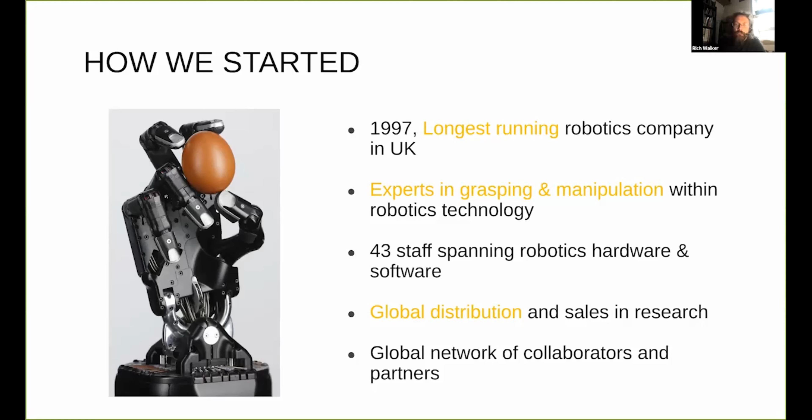ANA approached us a couple of years ago to say, as an airline, we're trying to move out of just doing flights because we think that it's a very crowded market and it's very, very competitive, and we'd like to do something innovative and novel. And we said, okay, why are you talking to a robotics company? They said, well, because we want to do telepresence. We want to put people in distant locations and fully immerse them there, make it possible for them to feel like they're actually in the other place without having to travel there. Wow, we said, okay, that sounds like a really interesting challenge.

So what did we put together? Well, working with SynTouch, who make touch sensors, and HaptX, who make haptic feedback gloves, this is the system that we had running in January last year in Tokyo. This is right in the heart of Tokyo in ANA's headquarters building. And on the right there, you can see Jeremy Fishel from SynTouch typing successfully.

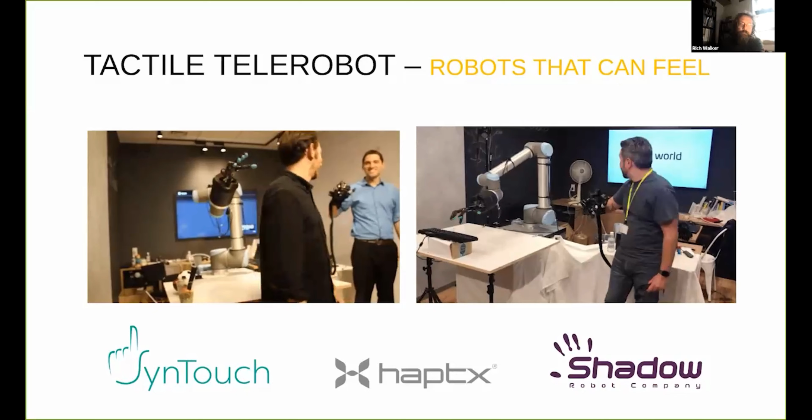We've run this from quite long distances. People ask us about latency, and we say, from London to San Francisco with a 4G connection in San Francisco and our normal internet in London, we were getting around 160 milliseconds latency. We had a bunch of journalists in the Wired office come up, put the glove on, and play with blocks, cubes and sticks and balls in our London office. We had about half a second latency on the Zoom call we were using for the remote vision.

The really interesting thing is if your vision lags your sense of touch, it's actually fine, because when you reach to touch something, you can feel the object before you see that you've touched it. If your touch lags your vision, however, reaching for things is very difficult, because the hand occludes the object just at the point when it gets critical to know exactly where it is. That's when we thought to ourselves, actually, this touch is really giving us something important in terms of using a hand remotely and getting a human to be able to do that.

Just to go through the system: essentially we've got the robot hand on the left, the human intelligence at the top, and the sensing of touch at the right. The Haptx gloves at the top give us the ability to render a sense of touch to the human. They have an array of inflatable pneumatic bladders on the fingertips that inflate and deflate, with high frequency control, so you can create perceptual illusions of various types of touch and contact.

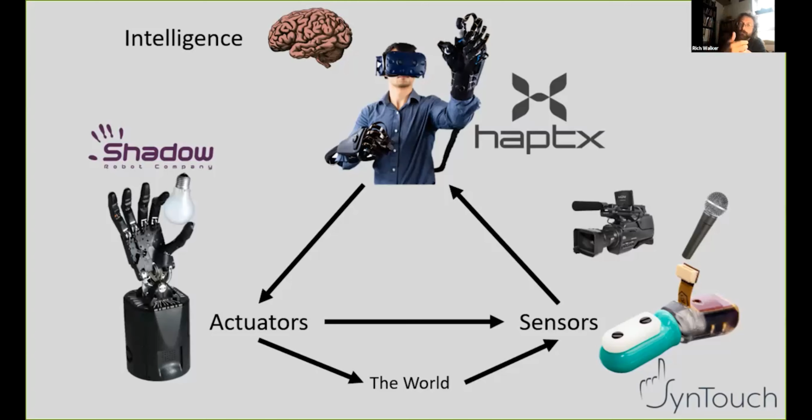So we close the loop around this chain, from the human intelligence through the actuator into the sensing, via the sensing at the remote end. You can see here a couple of examples of what's possible.

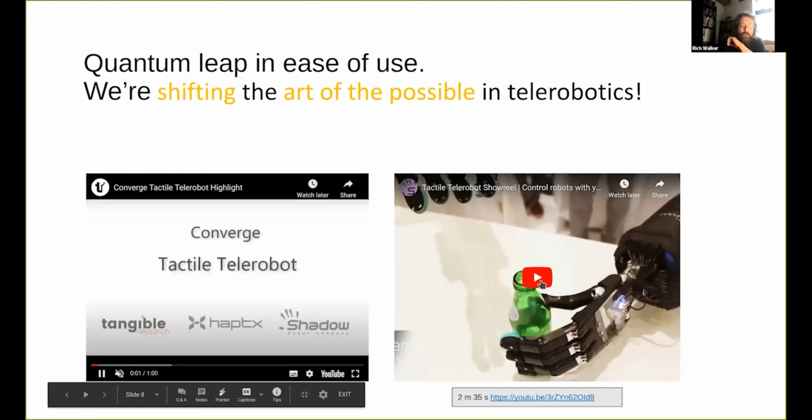I'll just leave this playing for a second. This is basically what we were exploring last year with this system. We think this is about the most dexterous telerobot system in the world, in terms of being able to perform simple tasks really, really easily, and being able to perform complex tasks at all.

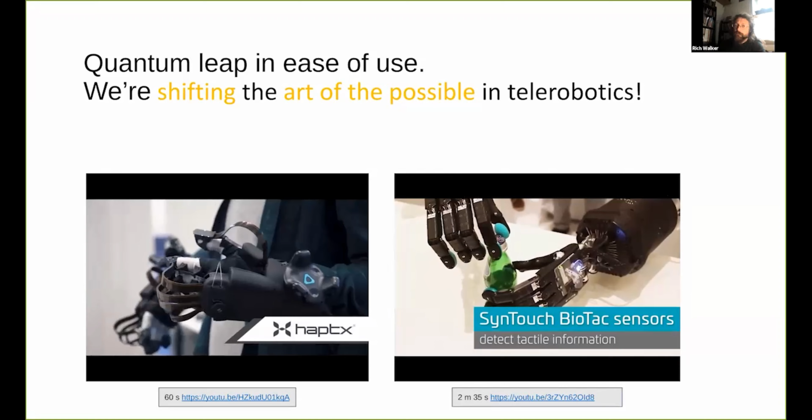Some of the things we're doing here with this telerobot are incredibly challenging, and we've never seen anybody do it with software systems at all. Even some of the reinforcement learning things OpenAI have been doing address tiny parts of this and don't address the full spectrum.

And then there are things that are really hard to do even with this. Putting the cap on the bottle is really subtle, and if your vision is occluded, it's really, really hard, even with a sense of touch.

But we can even just about handwrite remotely. That's what we call medical grade handwriting — if you can read a doctor's writing, you can read what that's written. Otherwise, it's pretty much useless. But we'll get there.

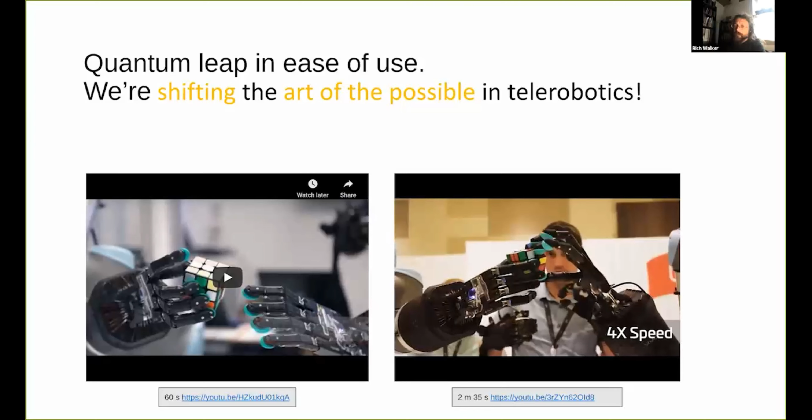And as for the Rubik's Cube, unpacking it, taking it out of the container, taking it out of the package, that's actually really challenging. Twisting it and rotating it is surprisingly easy, although knowing what you need to do to get it to work is obviously the core challenge there.

And the other thing that we're able to do with this is to handle objects that we can't quite see remotely. So again, that's a really important thing. Touch gives you the ability to deal with something where you can't tell what's going on. And here there's just reaching into a bag and taking an object out of the bag, and the operator has an occluded field of vision there. They know there's something in there, but they don't know what it is.

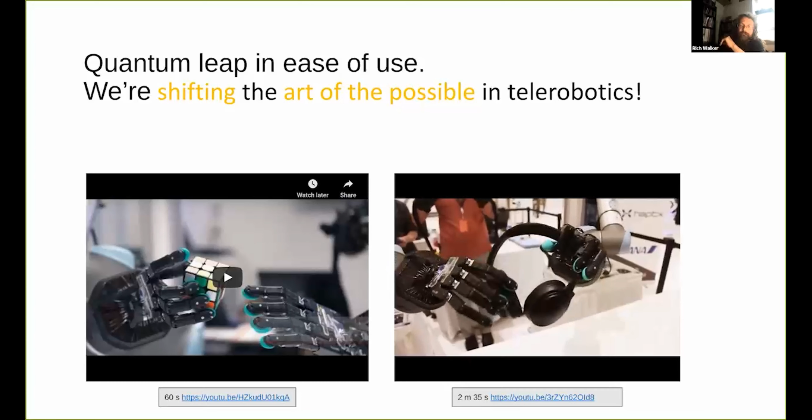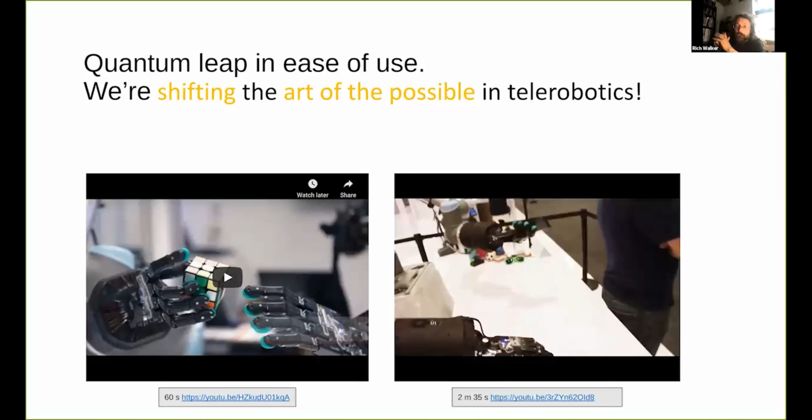Nice thing about using cobots is, of course, doing things like that is relatively easy. Your kind of risk management and risk assessment is feasible. And here's the kind of second intercontinental massage. And the flexibility of the movement here is really, really good. This is a level of dexterity and agility that we were, even doing it, impressed by. I wouldn't recommend doing this as your source of research funding, but we were in Vegas, so we figured that a little harmless pickpocketing was something we could probably get away with.

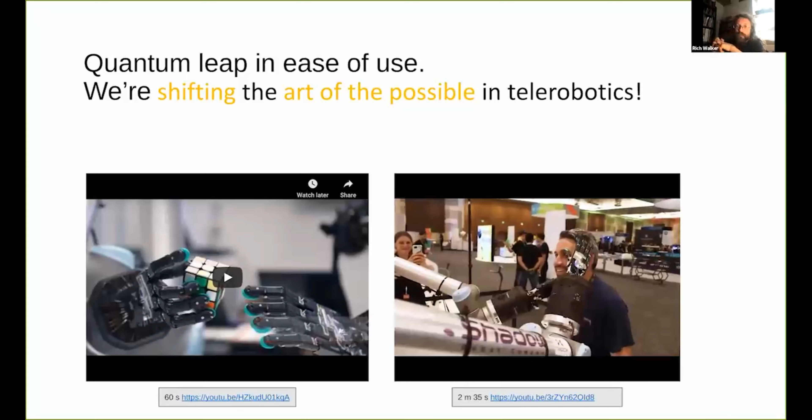One thing I don't know is whether we could actually feel Jeremy's pulse at the point when we were touching his neck. I think that might be just beyond the touch sensors yet, but it's an interesting direction to go in.

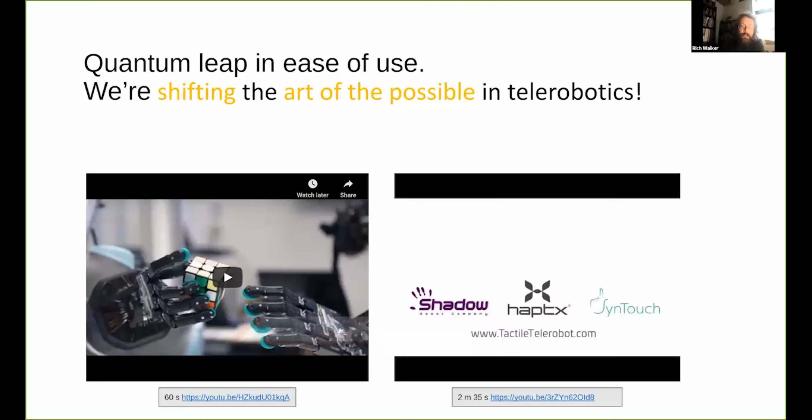So what does tactile sensing give us here? Well, the BioTac that we're using is a well-known sensor in the research community. I won't spend too long on this because either you know about the BioTac and you're familiar with them, or you don't. But to be honest, it's a 10-year-old sensor, so there's probably better out there in the state of the art now.

The practical point for us is that this is a sensor that I can simply send a purchase order to someone in California and a couple of weeks later get a sensor back that matches a spec sheet, that matches a functional spec, and has an interface that I know what it will be. And it has a reliability and a robustness that means I can then send that on to a customer and expect it to work. What the sensor does is almost secondary to that. For me, commercially, the ability to buy it is the key thing that makes a difference between this being an interesting R&D collaboration, let's see what we can do with this prototype sensor, and this being a real sensor I can tell other people about and make and ship.

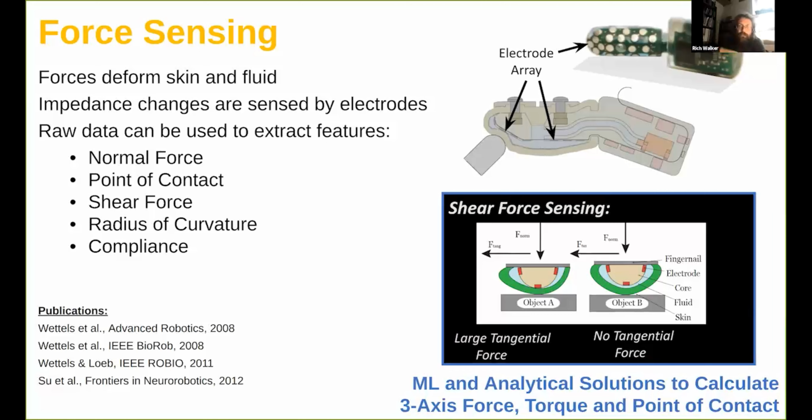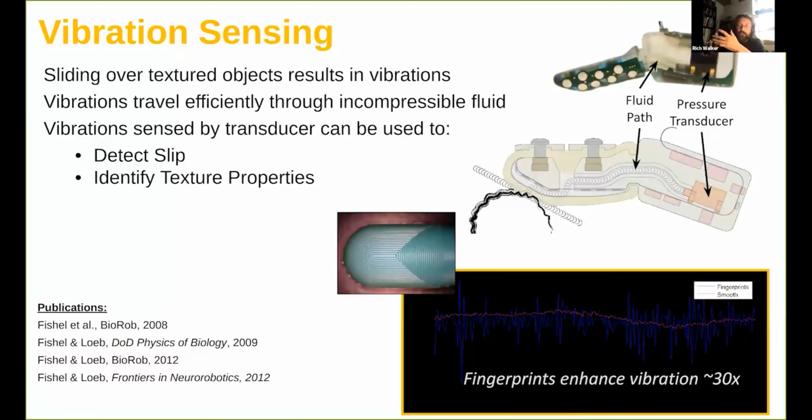So this sensor here is quite nice because it's a fusion of multiple techniques to do sensing. It has force sensing from this deformation of the skin. It does vibration sensing with a pressure transducer. And that means it can replicate some of the properties of the fingernails, of the skin surface, that gives you the ability to understand slip and contact and movement.

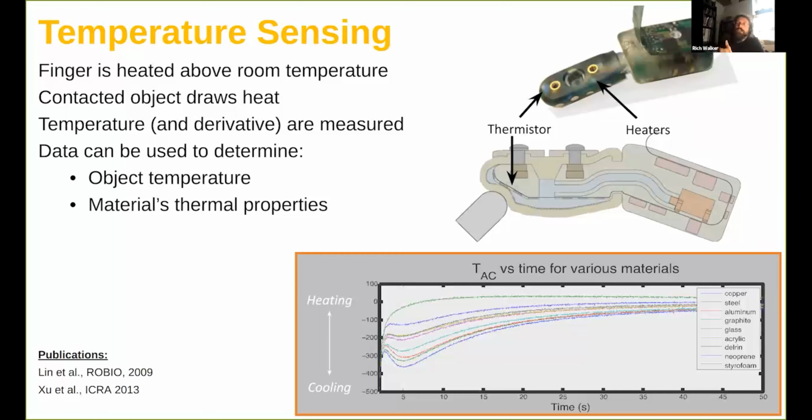It has temperature sensing because it's a little bit warm. The temperature sensor means you can actually tell the characteristics of the material you're contacting when you touch it, by measuring the change in temperature drop at the point of contact. You can see at the bottom some results from SynTouch analyzing how different materials behave when touched, and in fact SynTouch have demonstrated they can pull out this sort of map of 16 or 17 characteristics of touch for an object.

And use that to quantify what the sensor is touching. They now have a separate product line consisting of a touch sensor used for materials characterization, which they sell to people doing such fantastic pieces of engineering as: I'd really like to make a seat that feels like it's made of really expensive leather, but I don't want to use really expensive leather. Which of these plastic substitutes feels like that expensive leather? Using this kind of characterization analysis model, they've actually been able to successfully do those kind of discriminations.

So it's now used in high-end design to say, okay, how can we scientifically show that these materials are equivalent to the materials we wanted to use in terms of how the human feels and understands them, which is pretty cool. Of course, the challenge you then have as a teleoperations system designer is how do you take that complex set of data and turn it into something the human at the other end of the system can understand. That's still a technical challenge for us. If you have better ways of doing haptic rendering, I'm also interested in talking to you about those later on.

So what does it do for robotics? Well, touch, very fundamentally for humans, is what we use to connect with the world. We see things, but we don't believe they're there unless we touch them. That's a very important grounding for us. The sense of touch, your ability to interact with objects, is a huge part of how you learn your motor movements, how you learn to interact with things, how you learn to operate in the world. Without a sense of touch, it's very hard to actually get vision to work. Vision bootstraps partly by touching things and moving things through the field of vision. So it's a really important fundamental part of the way the brain works.

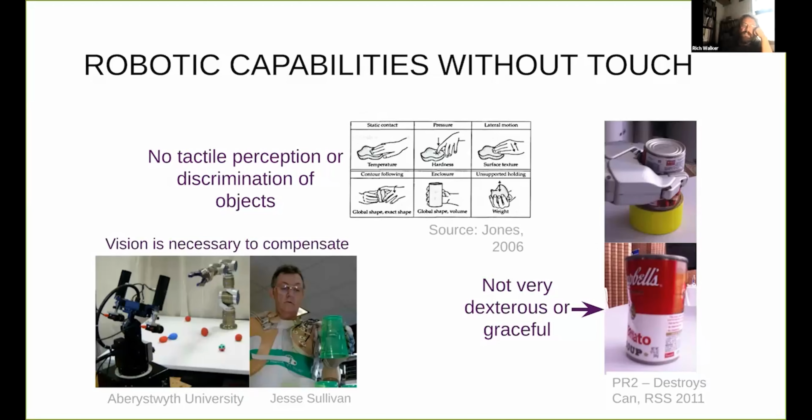There he's picking up one of the plastic cups we were using earlier, but it requires an absolute sense of concentration from him. He's looking at it all the time, really concentrating. If you have a sense of touch, suddenly movement becomes fluid because you almost delegate picking things up to your sense of touch. You know where the object is roughly, you reach for it, you try and touch it, you feel it, it's there.

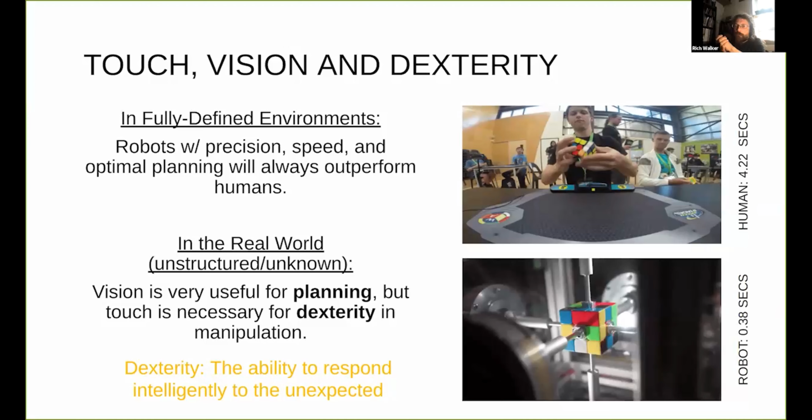So here we see working in constrained and unconstrained environments. The robot on the bottom is obviously over-constraining the problem and can just use vision to solve it. The human at the top is using both vision and touch, although I suspect they could do that blindfolded. The robot is a lot faster than the human, but the human could do that in a different place.

In terms of what we can do with telerobots, we've seen a lot of really impressive telerobotic systems that don't use touch. We've seen people in the EOD, bomb disposal community, do really, really hard tasks with very, very simple telerobots, but they train all the time. They train constantly, and if they stop training, they lose the ability to do it.

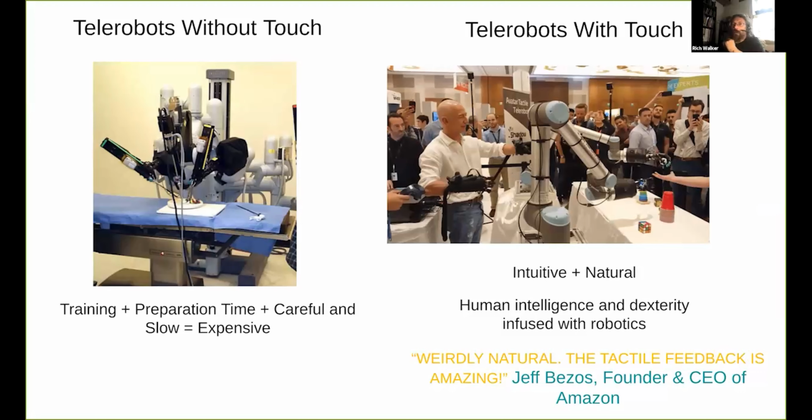Whereas on the right there, any layperson can pick up this system and be using it in a matter of seconds. We gave Jeff about 10 seconds of briefing on how to operate it, and he just put the gloves on and was able to control the telerobot there.

So where do we see these going in industry? Well, we're pretty simple people. We want to put these robots where humans shouldn't be - in difficult, dirty, and dangerous places.

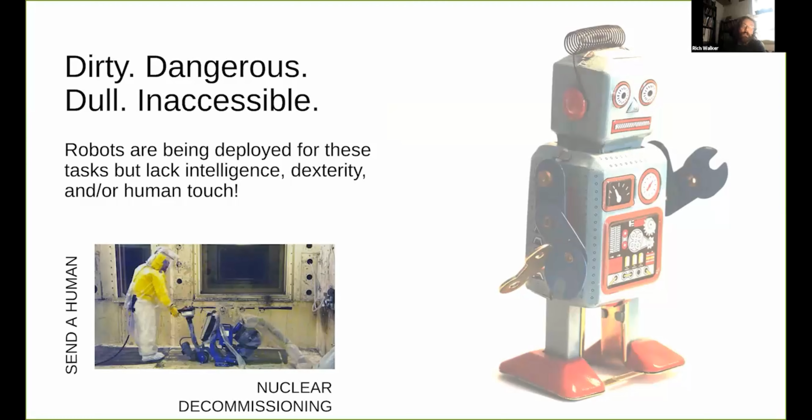So we want to do that. We want to put those robots pretty much anywhere and control them from anywhere else, whether those are dangerous and inaccessible environments, or whether that's just taking a skill and putting it in a different place, or exploiting autonomy and intelligence in the robot so that the human can control multiple robots, so the robot can do a semi-automated task, and when it gets stuck, the human can reach in and use their vision and their touch and their intelligence to make the task possible.

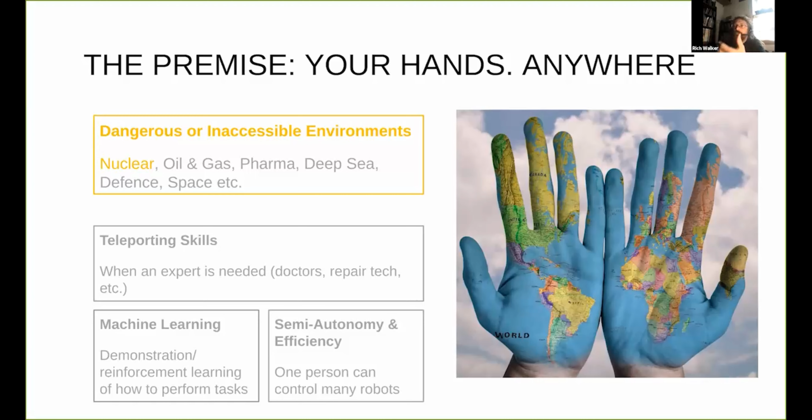We think this is a really interesting kind of step change in what can be done, because now we can put a sense of touch anywhere, and hopefully we can understand how to use that to turn it into deployable skills, to turn it into effective telerobots.

So, sense of touch, absolutely important to get manipulation and perception to work well. You can do things with just vision, but touch makes them easy. If you're doing complicated tasks, difficult tasks, or stressful tasks, having a sense of touch makes it easier for the operator to get on and do the task rather than operate the machine, which we think is the real transition here.

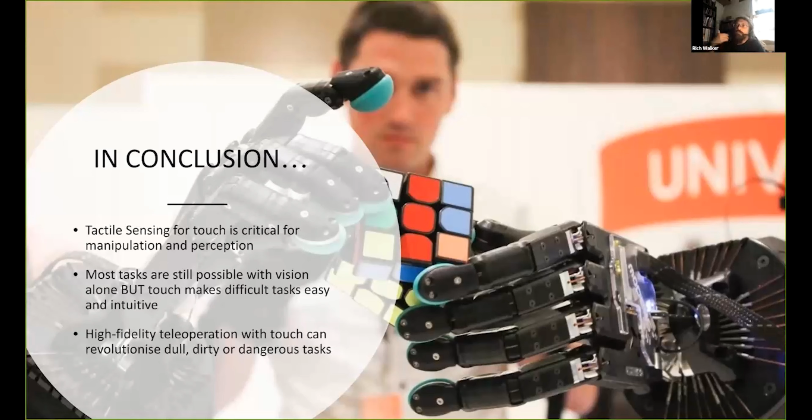Using the sense of touch to make it easy for humans to use their innate understanding of touch to do tasks well. So our hardware is now out in the world and available.